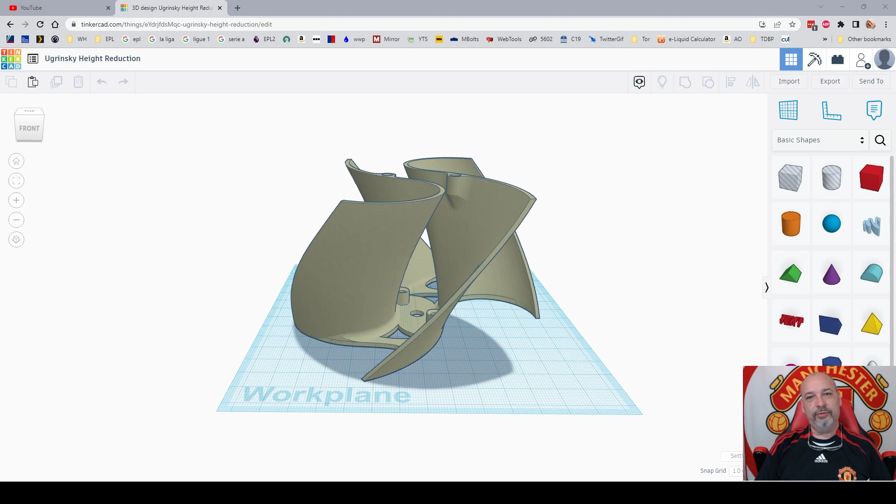Hey folks, there might be times when you want to split a model up for various reasons. Maybe it's too big for your print bed, or maybe you're having problems printing it and you just want to troubleshoot and track that. So I'm going to try to see if I can help you out with that.

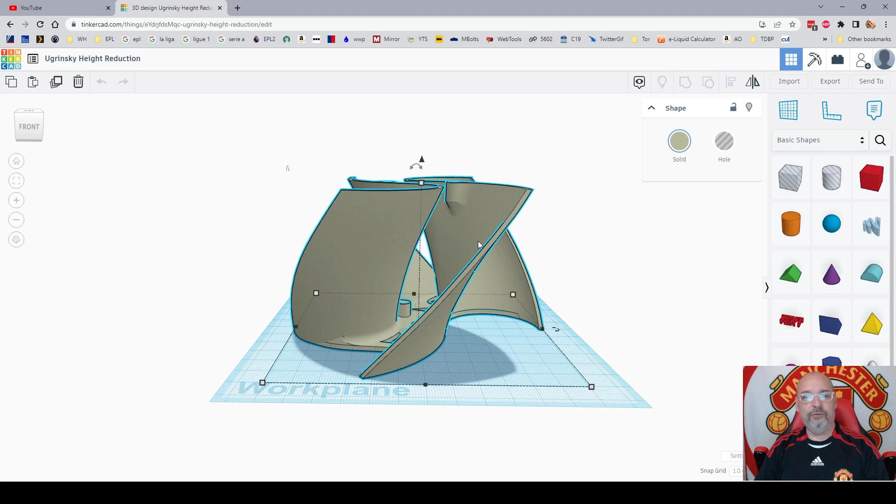So I've got this Ugrinsky fin imported into Tinkercad without any modifications, and it's not pretty. I mean, it's going to have some artifacts and things like that, but it'll print just fine. But what if you wanted to scale this thing up massively, but you didn't want all the height in one go? Well, that's an easy thing to do.

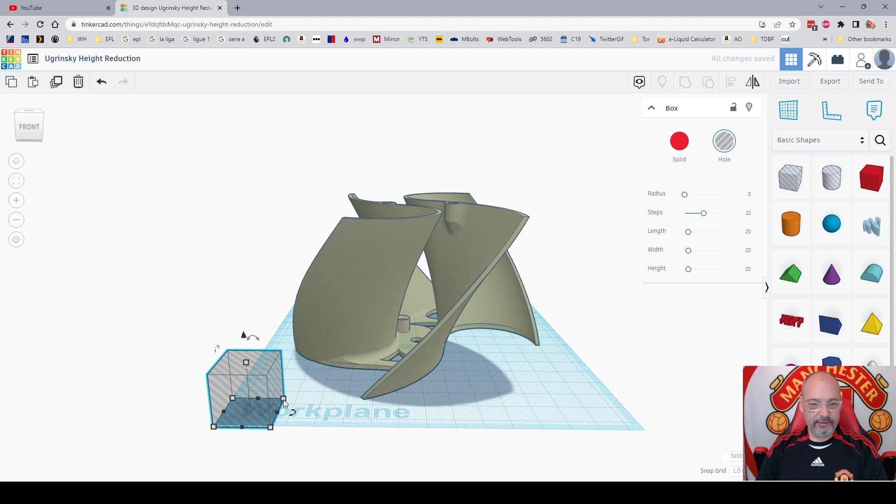So I've got the main piece imported and selected. What I'm going to do is make a duplicate of that by hitting Control D. Easy enough. Now I'm going to make a basic transparent box that's going to cover the bed. The size is not important as long as it's enough to cover the whole design.

And now I'm going to make a duplicate of that. So we've got two fins, two boxes. The height of this is 70, the original 70 millimeters. We want to make it roughly half.

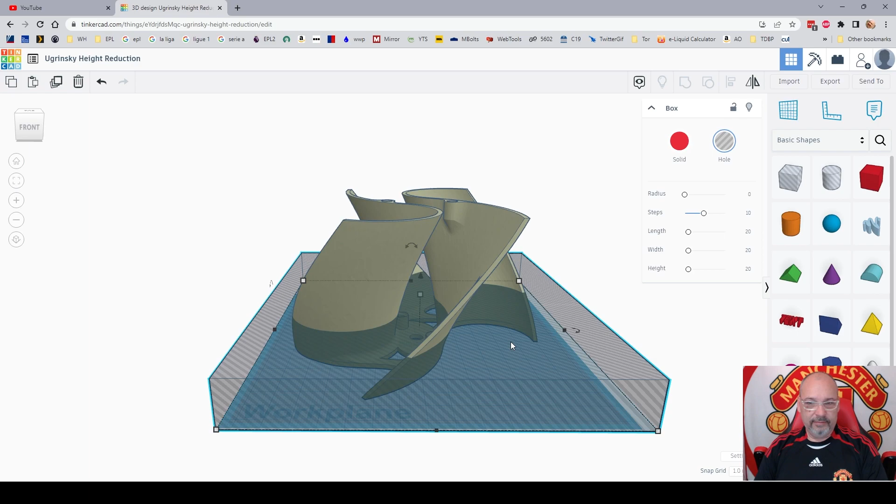So what we're going to do is move one of these out of the way for right now. I'm just going to drag it way down. Same for this. And that way we're not confused by what we're working with.

Okay, let's take the top 20 and the bottom 15. Well, actually, I didn't need to do that.

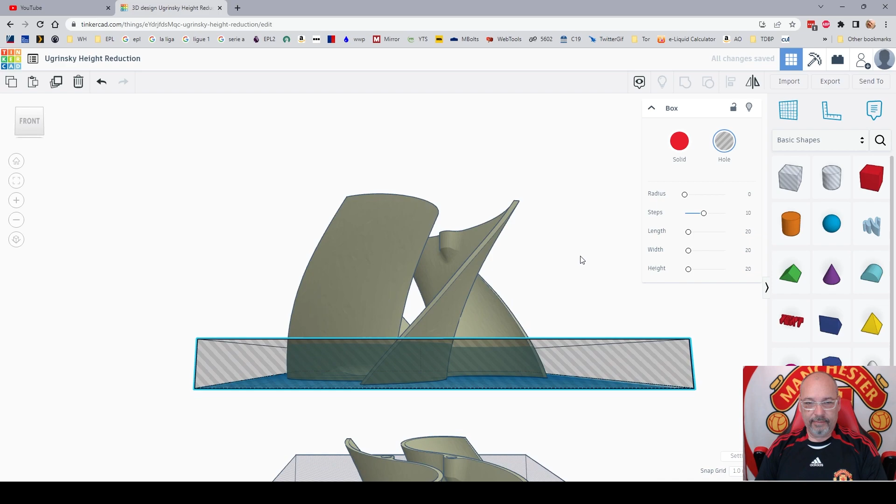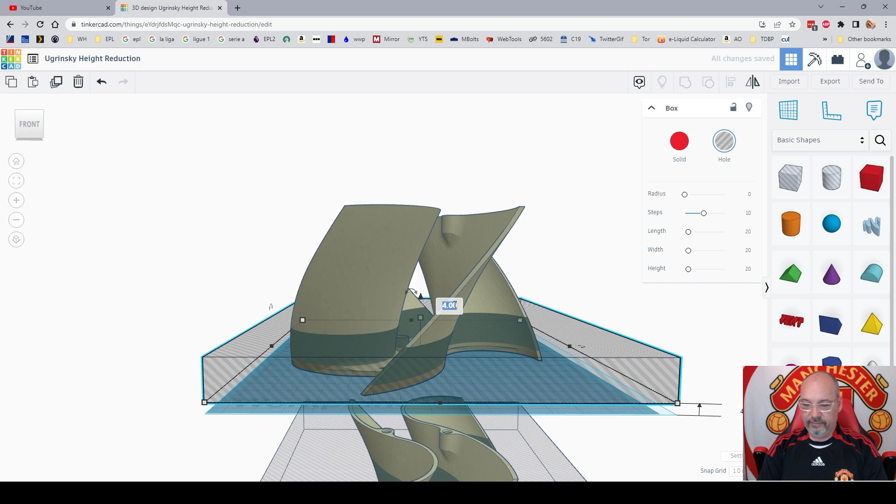Sorry, what I wanted to do was raise this box off the floor by 15. So what I'll do is select just that. I'll grab this handle to drag it up, and you see that in the middle where it starts to count how far I've got it. While that's displayed, I can just hit that and type in 15. It'll raise it up 15 millimeters off the floor.

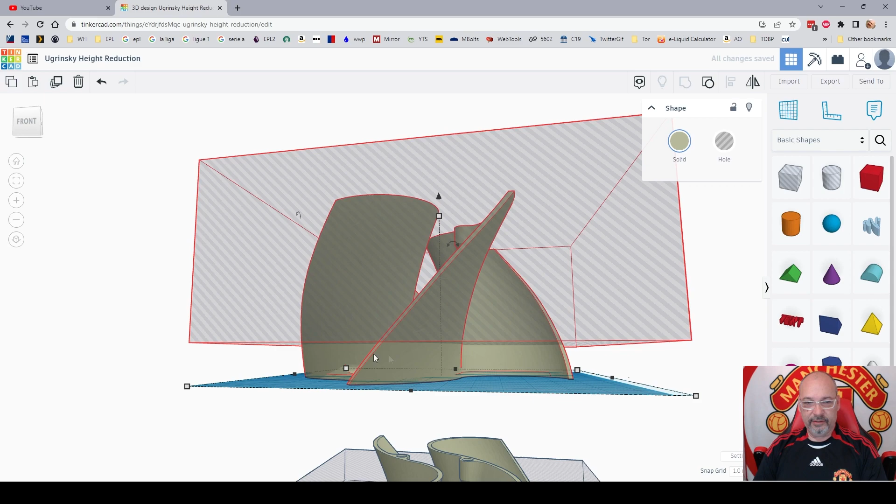So now that I've got the bottom of this where I want it, I'm going to expand that box all the way to the top. So if I group this by hitting Control G, then it's going to leave me with just the bottom 15 millimeters.

Okay, so I'm going to take this guy, just raise him up out of the way, and I'm going to drop these two to our workplane. Okay, now what I want to do is take the top 20 millimeters of that. So it's kind of an easy way to do that.

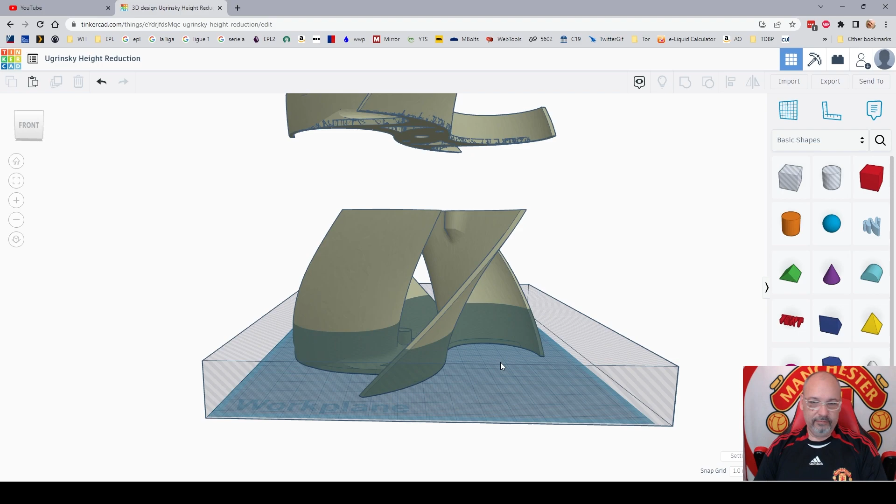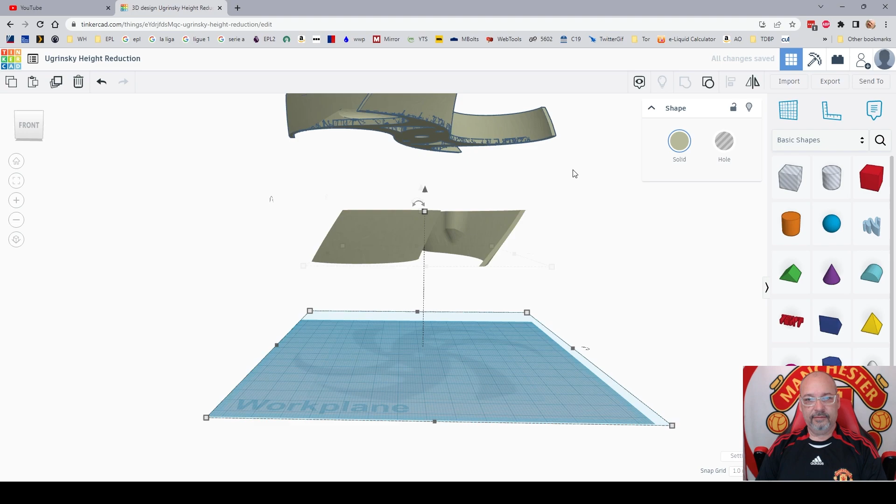I could do the math, and I could say 70, and I want 20, so let's just take this 50 high. And then I'm going to group those, combine them with Control G. I want to drop that piece to the bottom. Now, so I've got a 15 high and a 20 high. That's 35, which is half of our 70, and that's what we wanted.

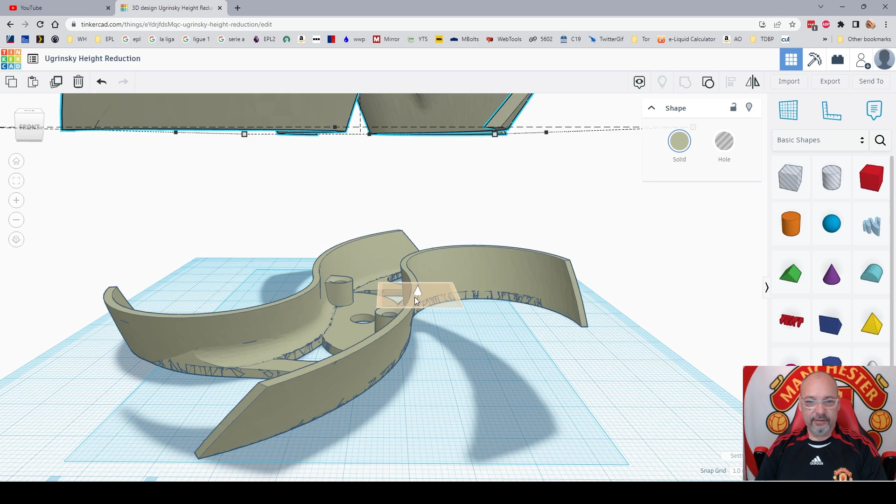Now I want to drop the top piece onto the bottom piece. So I'm going to zoom in here. I'm going to hit my W key to place a work plane right here. Alright, that work plane is sitting right on the top of this piece.

I'm going to drop this piece down. So with it selected, I'm going to hit D. That will drop it right on top of this piece. And I'm going to hit W and set my work plane back to normal.

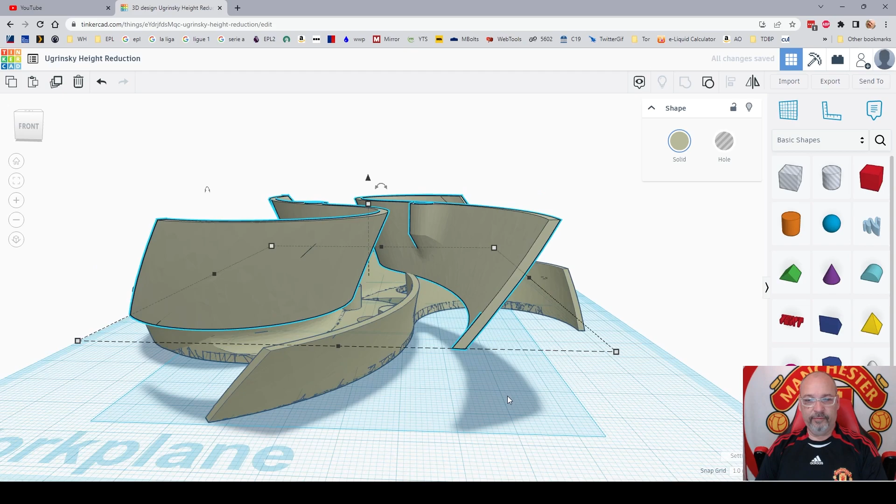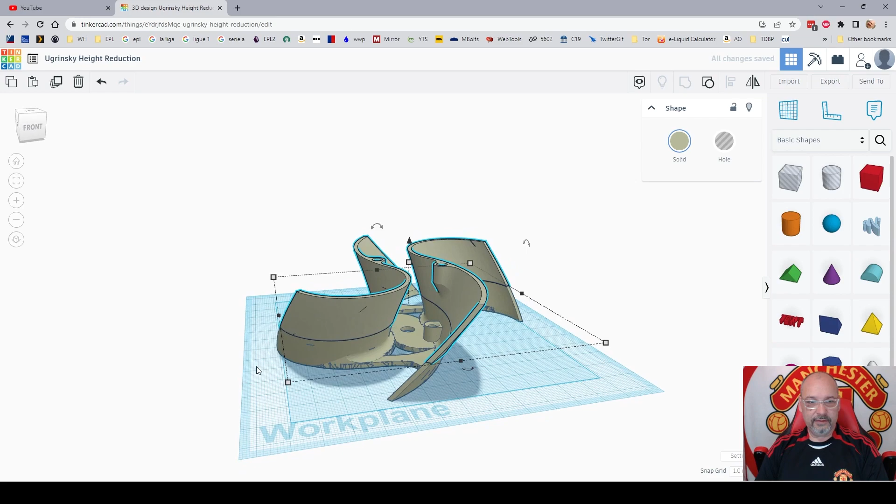Okay, well, we've got the height right, but now the rotation is off. So that's an easy fix. What we'll do is with the top piece selected, we'll grab the handle and we'll rotate it. Yeah, there we go. That looks good.

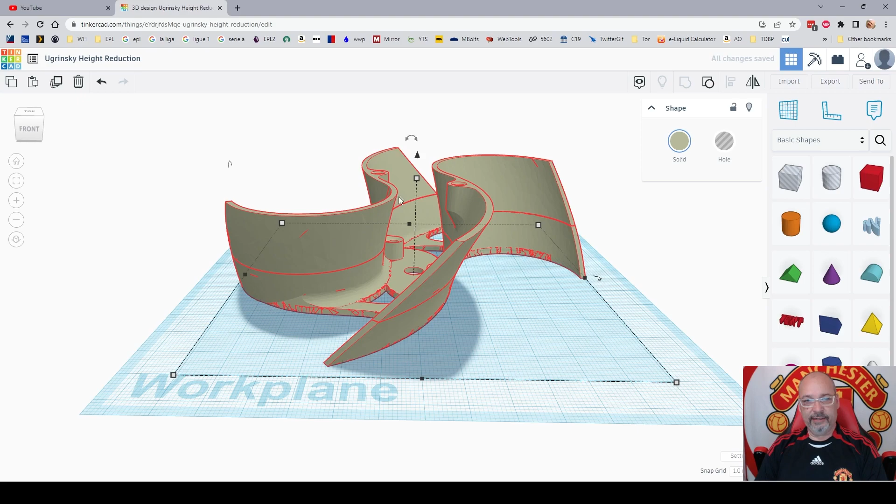I'm going to select both of these, and I'm going to hit Control G to group it. And sometimes with all these ugly faces and everything, all these different triangles that Tinkercad's trying to piece together, it may take a minute. And there it is. Okay, so we have our 34.99, close enough height.

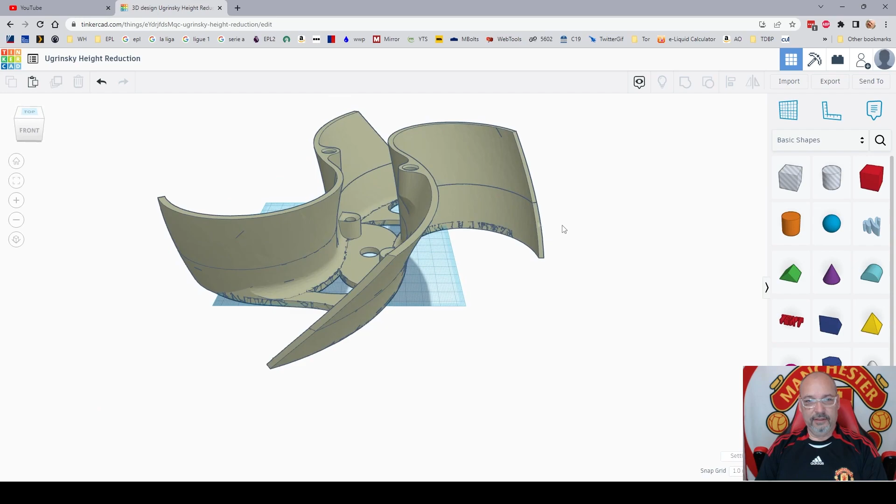Now that will be much easier to print than the other. And you can use those same principles for whatever your case is. You know, maybe you have something that's going to take supports. But if you sliced a piece of it off and printed it separately and laid it down, you could print that without supports and then combine it once you're done. That's another good use for this.

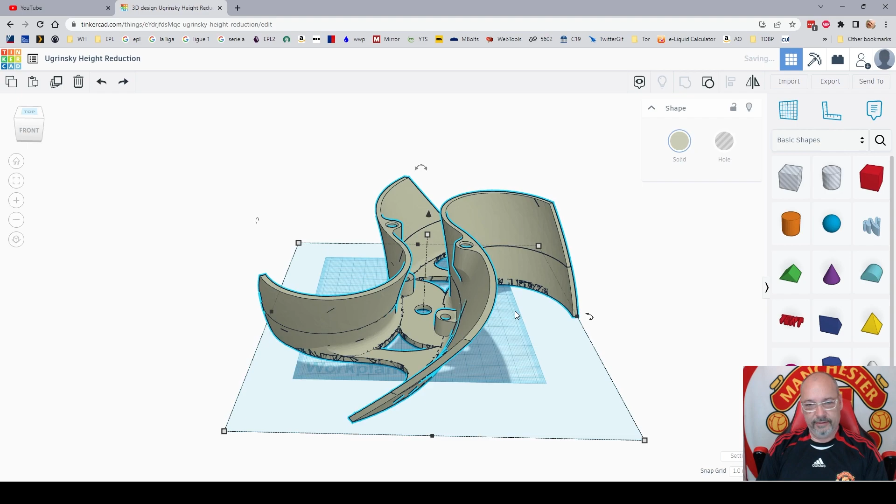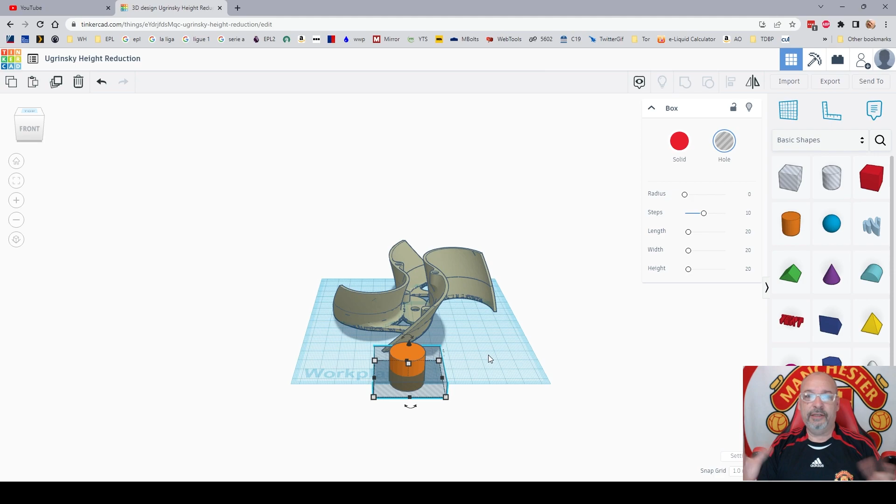You'll be using that kind of technique all the time for various things. So it's good to know that you use 2 copies of the solid and 2 copies of the hole. You'll just break those into pieces and combine 1 solid and 1 hole, 1 solid and 1 hole. Make sure you size them like you like, put them together, and boom, you're done. Okay, hope this was helpful.